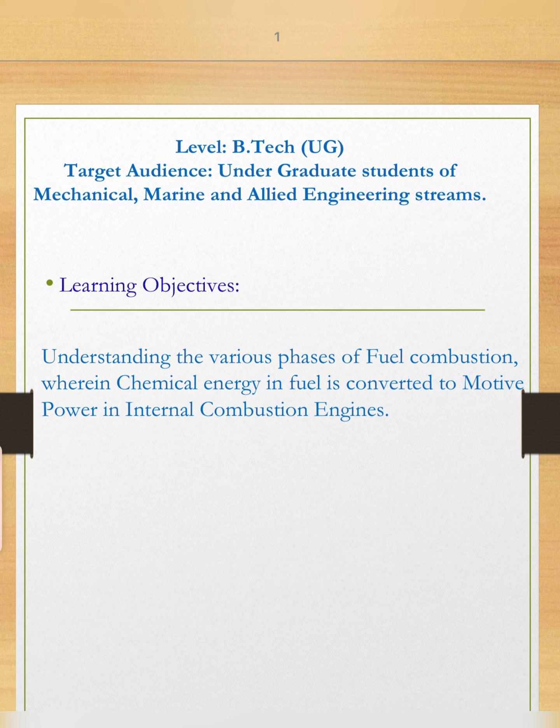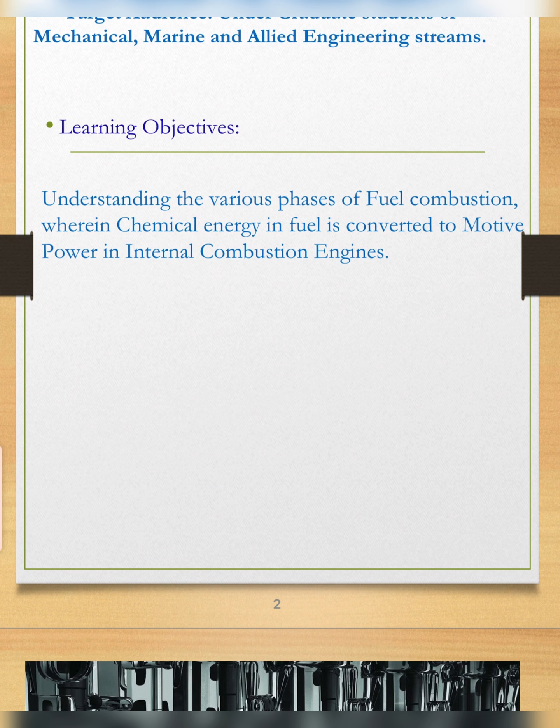My today's lecture will be on combustion of fuel in internal combustion engines. Level is BTech, undergraduate engineering courses, and the target audience would be undergraduate students from mechanical, marine, and allied engineering streams. Our learning objectives will be understanding the various phases of fuel combustion, wherein chemical energy in the fuel is converted to mechanical energy to run an internal combustion engine.

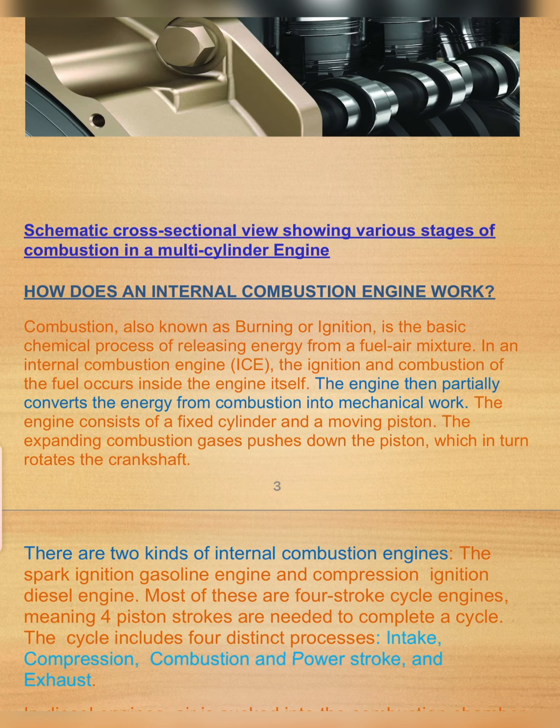Here you can see a schematic cross-sectional view of a multi-cylinder engine where the pistons are at various stages of combustion. So what do we basically understand by combustion? Combustion, also known as burning or ignition, is a chemical process in which fuel is burned, the chemical energy is converted to mechanical energy, hot gases are produced, and these hot gases in turn push the piston down, and in turn this piston rotates the crankshaft. So chemical energy is converted to mechanical energy in the engine.

Now there are two types of internal combustion engines. One is the petrol engine and one is the diesel engine. Petrol engine works on spark ignition, and the diesel engine works on compression ignition.

So in compression ignition diesel engines, there are four distinct processes. One is the intake or the suction stroke. The second is the compression stroke. The third is the combustion and the power stroke. And the fourth is the exhaust stroke.

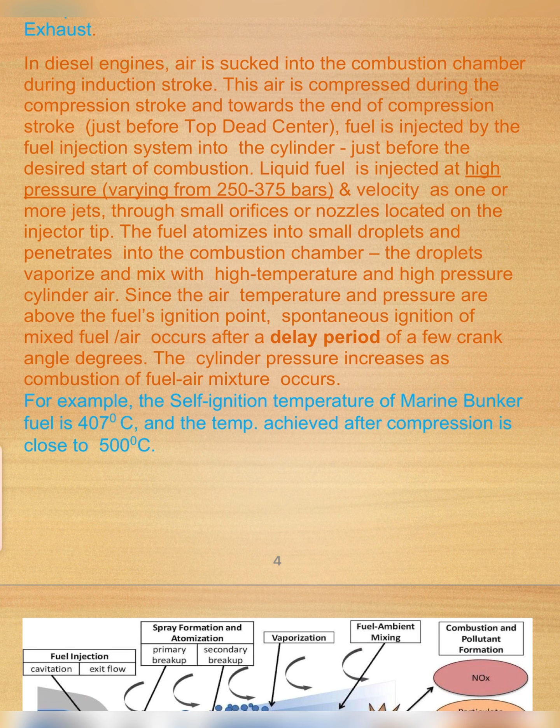So what basically happens during combustion? The process that happens inside the engine is when the piston is moving down, fresh air from the atmosphere is sucked in. Then again, when the piston is moving up from bottom dead center to top dead center, compression takes place, and at the end of the compression stroke, just before TDC or the top dead center, fuel is injected, wherein combustion starts, burning starts, hot gases are produced, and the piston is pushed down to do mechanical work.

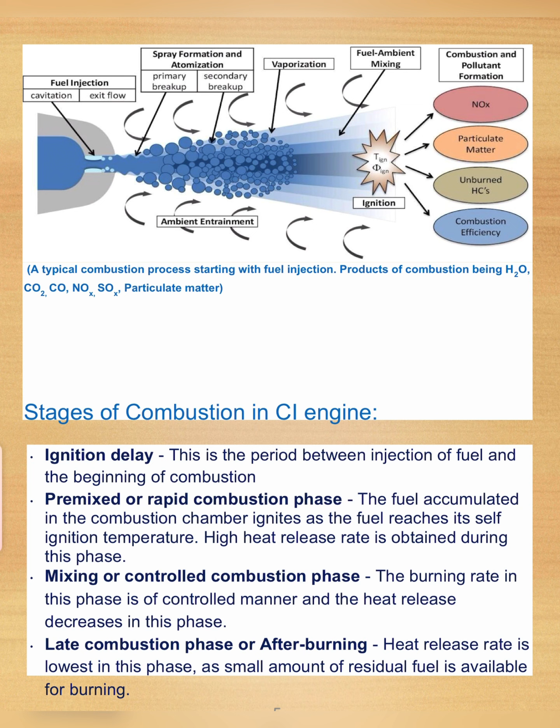This is a schematic drawing showing the various stages of combustion. The first stage is the injection of fuel. Bigger droplets injected into the combustion chamber get atomized, converted to smaller droplets, which is called atomization. The smaller droplets, in contact with the hot gases or the hot compressed air, get vaporized, and this vaporized gas, after reaching the self-ignition temperature, starts combustion. So this is the process of combustion.

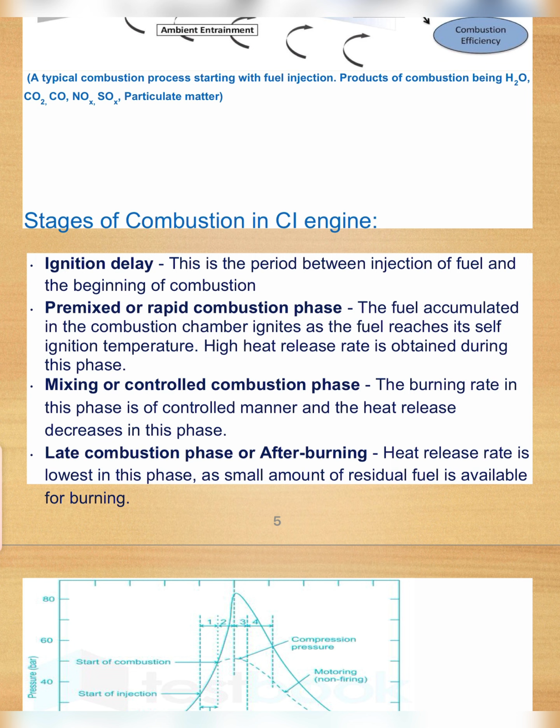Now we are going to discuss the stages of combustion. Combustion can be briefly divided into four stages. First stage is the ignition delay. Second stage is the rapid or uncontrolled combustion phase. Third stage is the controlled combustion phase, and the fourth stage is after burning. Here we can see a graph plotted as pressure against the crank angle. Pressure in the combustion chamber is plotted against the crank angle, shown here on the x-axis.

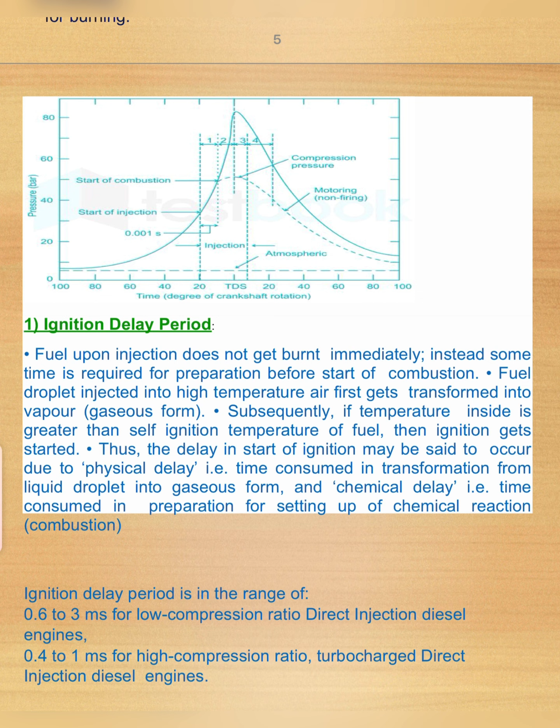Now we will talk about the first stage, the ignition delay phase. Ignition delay is defined as the time between the injection of fuel in the combustion chamber and the start of combustion. So fuel does not get ignited immediately when it's injected. It takes some time for the fuel-air mixture to get prepared, after which the fuel gets ignited. This difference in time, or this time duration, is called the ignition delay period.

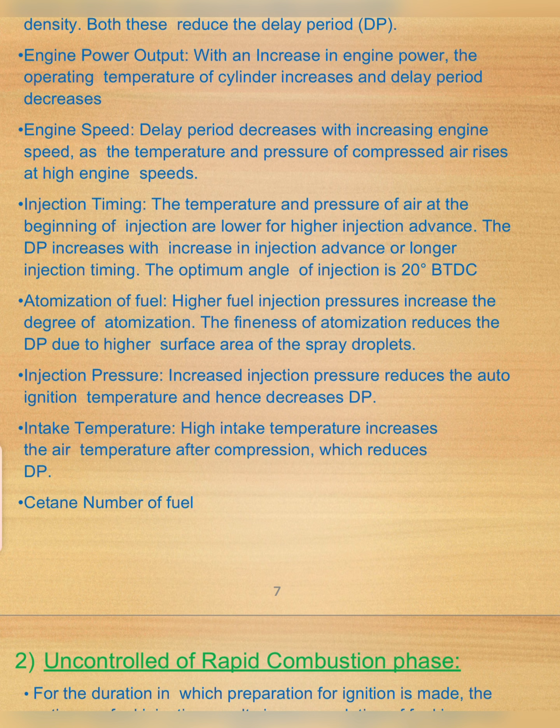So ignition delay period depends upon several factors. Briefly, the factors are compression ratio of the engine, power output of the engine, the speed of the engine, whether it is slow speed, medium speed or high speed engine, injection timing with respect to the crank angle, atomization of fuel or the degree of atomization of fuel, injection pressure, intake temperature or the suction air temperature, and lastly, but not the least, the cetane number of fuel.

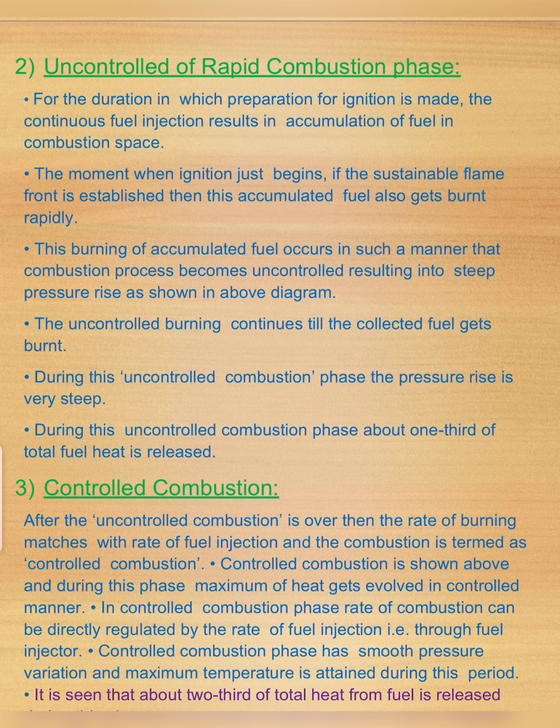Next comes the uncontrolled combustion phase. This is the second stage of combustion where combustion is initiated or combustion starts. The fuel that has been accumulated in the combustion chamber now starts burning, and there is a very steep pressure rise during this phase. That's why all the fuel starts burning, and this is called the uncontrolled combustion phase.

Next stage is the controlled combustion phase. Controlled combustion means the fuel injection rate is equal to the combustion rate. Here the pressure rise is not so steep, but occurs gradually. Almost two-thirds of the total heat energy in the fuel is released during this phase, meaning most of the power is being developed in the controlled combustion phase.

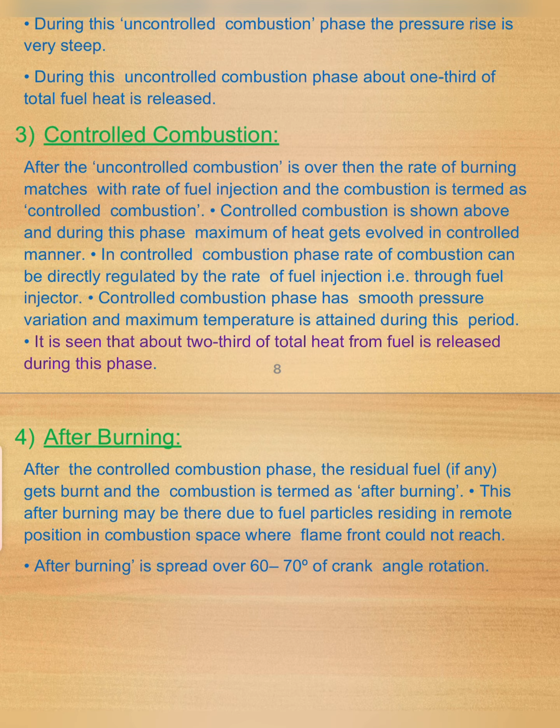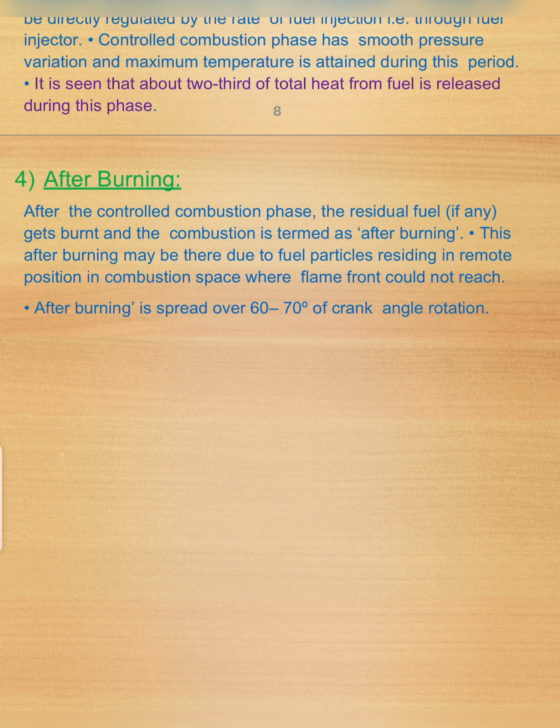After the controlled combustion phase is the last phase, the fourth phase, called afterburning. The remaining fuel that has been left over in the remote pockets of the combustion chamber now burns away. So all the fuel is burned in this phase, and this occurs spread over a period of 60 to 70 degrees of crank angle rotation. So this is all about...